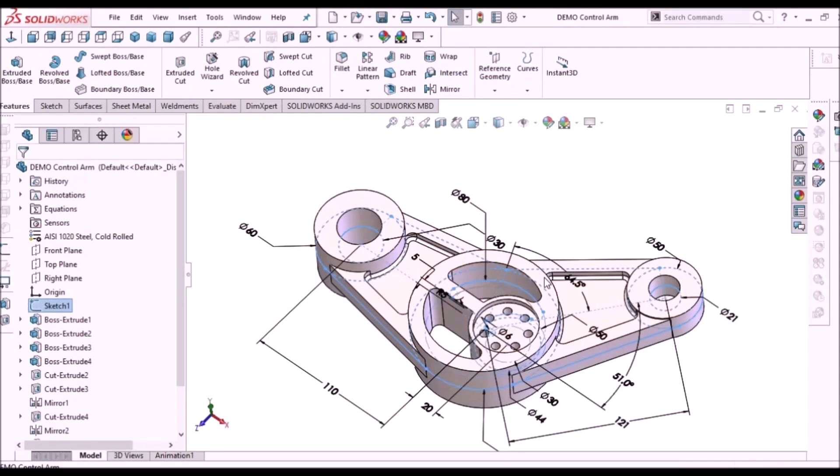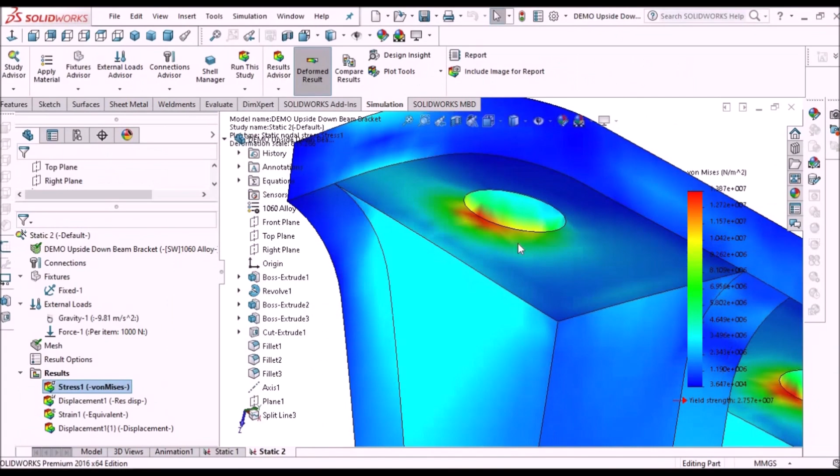I am going to train you in different modules like part modeling, surface modeling, sheet metal enclosure design, plastic components design, product design, reverse engineering, simulation, and many more tips and tricks in SolidWorks.

Hi, today I am going to explain how to create a sheet metal cuff bracelet. I am going to explain this in the sheet metal module. So this is the component.

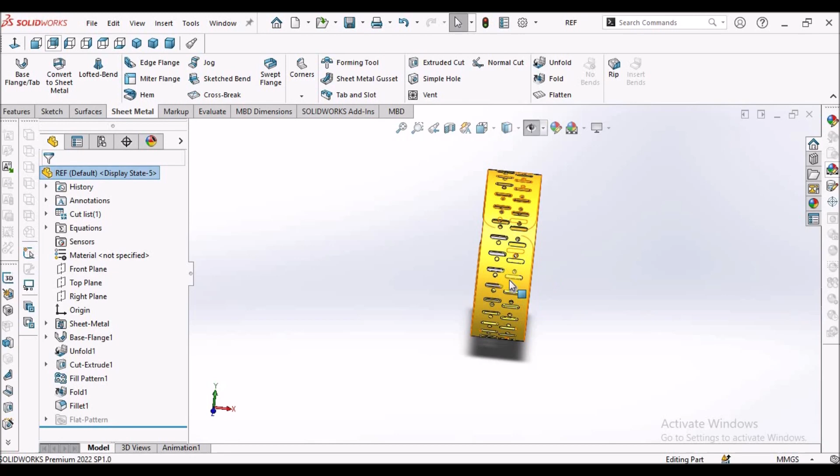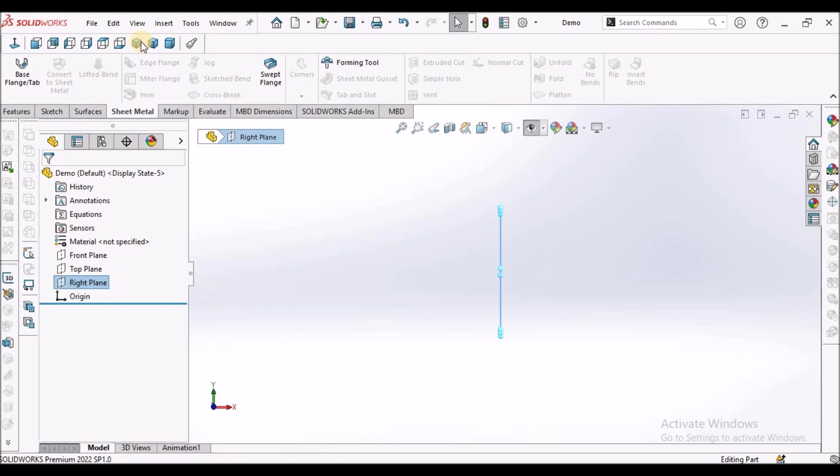So I've taken a new SolidWorks part file. Select the right plane. Go to sketch. Draw a circle. This is 60.

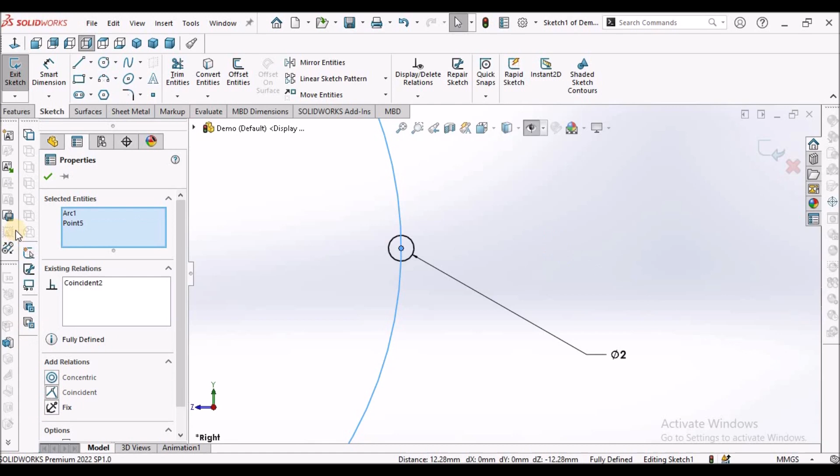Draw one more circle, and I am going to assign 2 mm. Select this center point and origin, make it horizontal, and select this big circle and the center, make it coincide. Now make this circle construction, and go to trim entities and trim this inside.

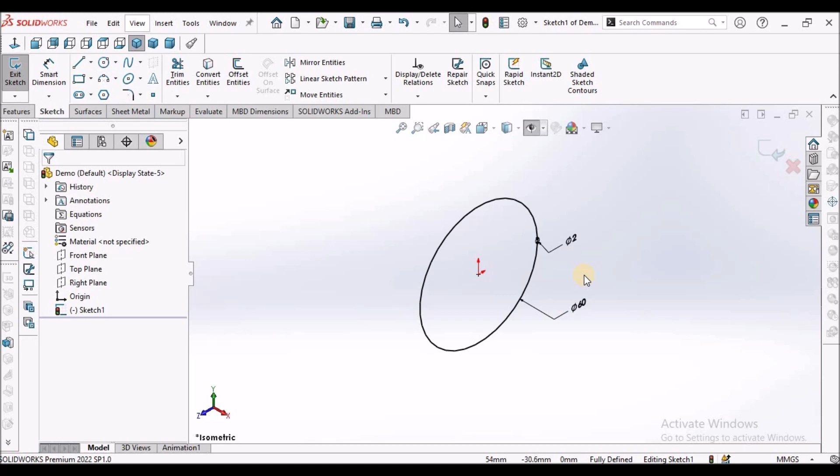So I am going to keep it in isometric view. Now go to sheet metal module, select base flange, and select mid plane. This is 20 mm, and sheet thickness I am going to take 1 mm, radius 1 mm, and K factor 0.45.

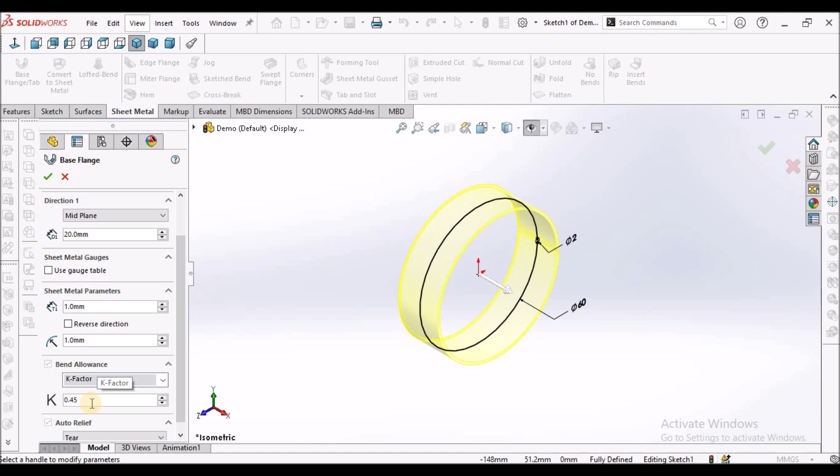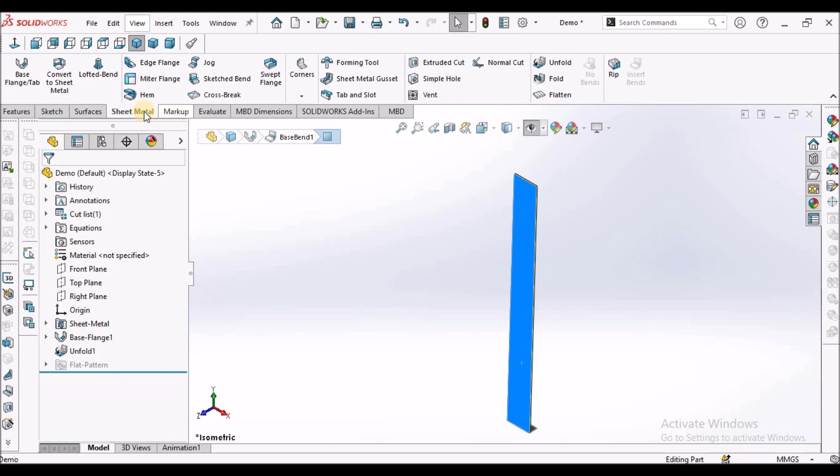Now we have to unfold this. So select this edge, collect all bends, and say OK. See here. Now select this face. Go to sketch.

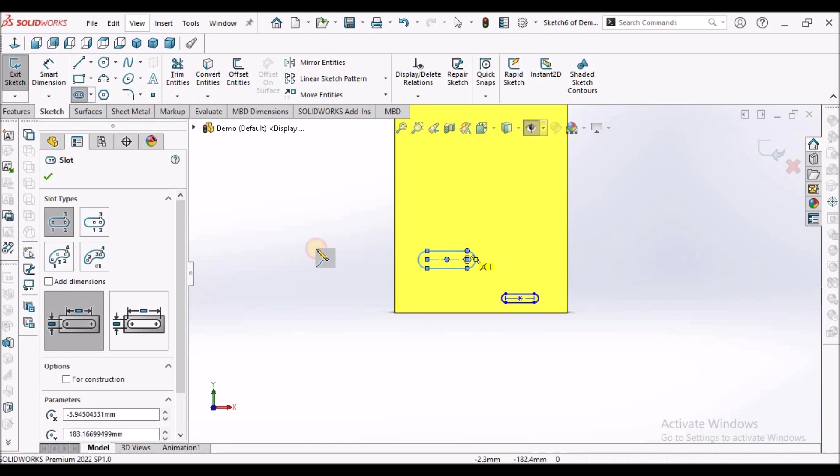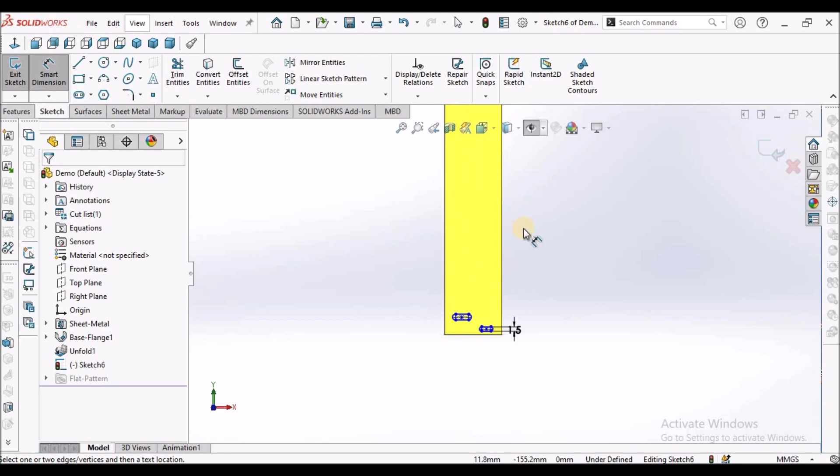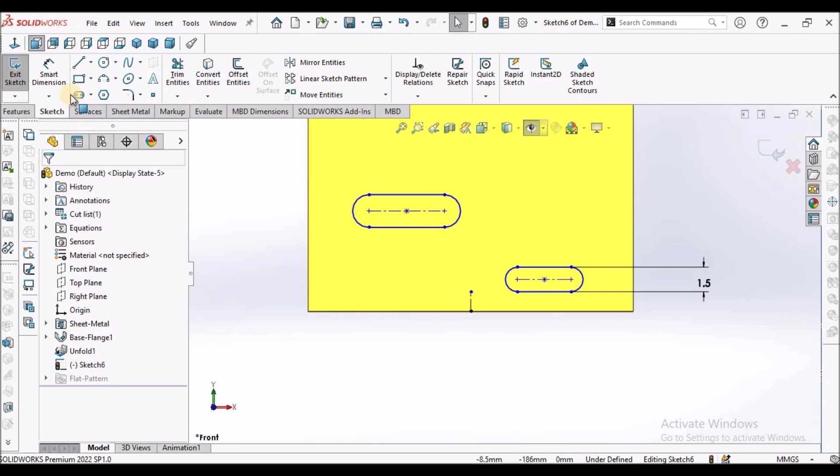Now I am going to create this slot and holes cut out. Draw a straight slot on both the sides. This is 1.5, and this is 3.5. Let me keep it in front of you. Now, for better understanding, I am going to draw one small center line for easy dimensioning. This is 3.5, and this is also 3.5.

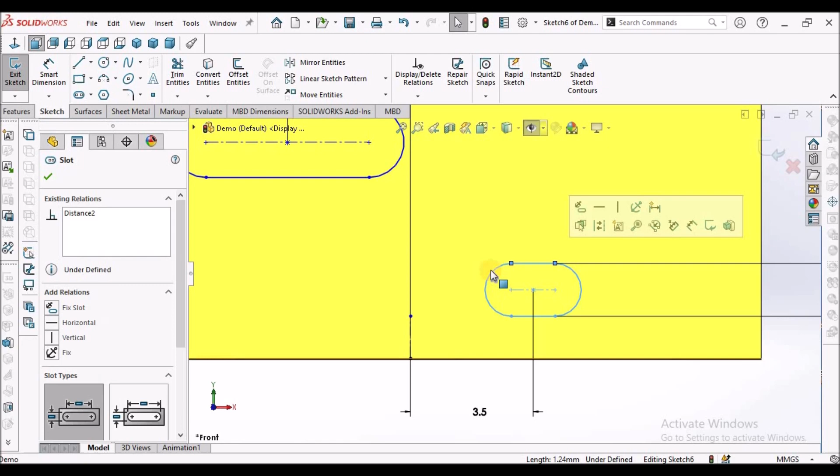We have to select these two lines, this line and this line. So we have an option, equal slots. Select this. Now we can dimension this value. This is 5 mm. See here, this is the 5.

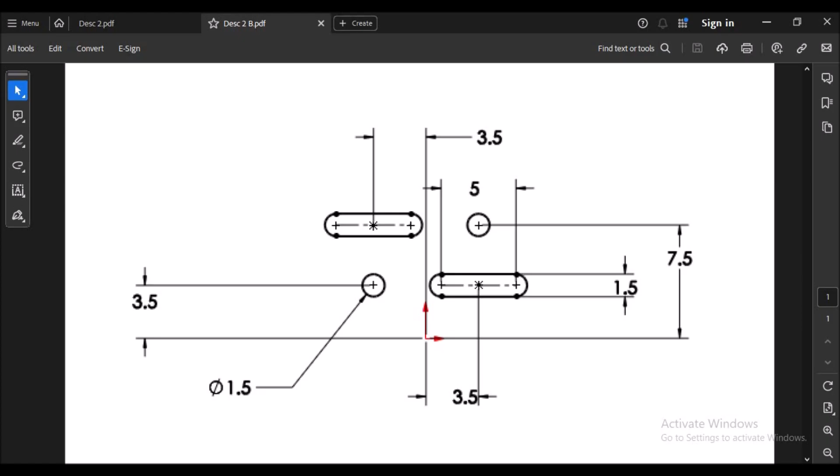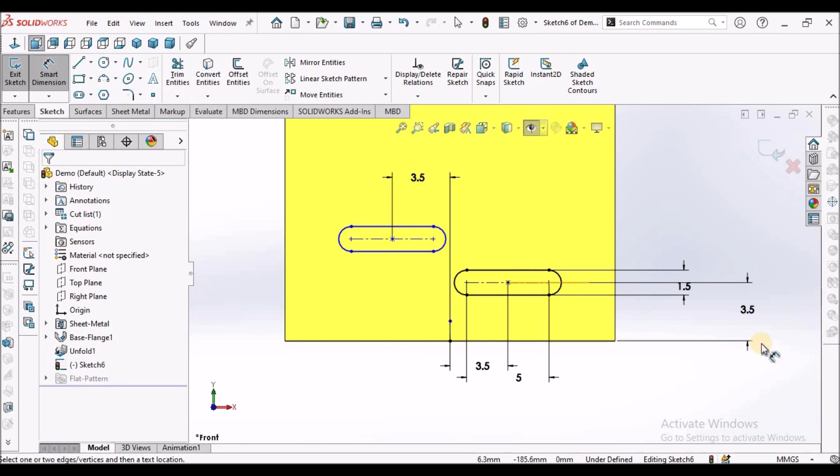And the distance between the center of the slot and this edge is 3.5. Similarly, the other side is 7.5.

Now I am going to draw 2 circles, simply placing them randomly, and I am going to make these 2 circles equal, and this is 1.5. Select the center and this one, make it horizontal, and this center and this center, make it vertical. So it is constrained now. Similarly, select this center and this center, make it vertical, and this one, make it horizontal.

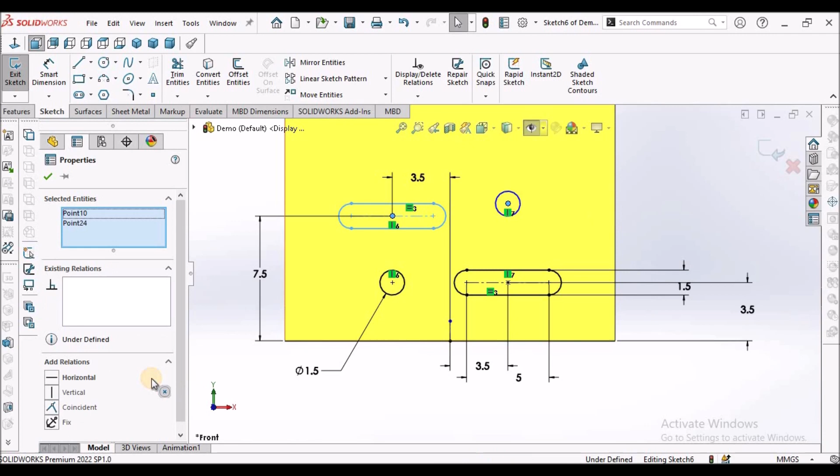Now go to sheet metal module, select link to thickness, and say OK. So this slot has been created now.

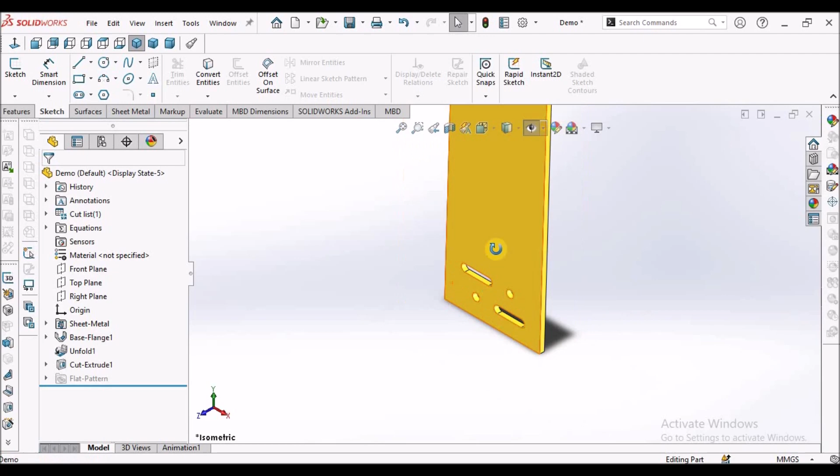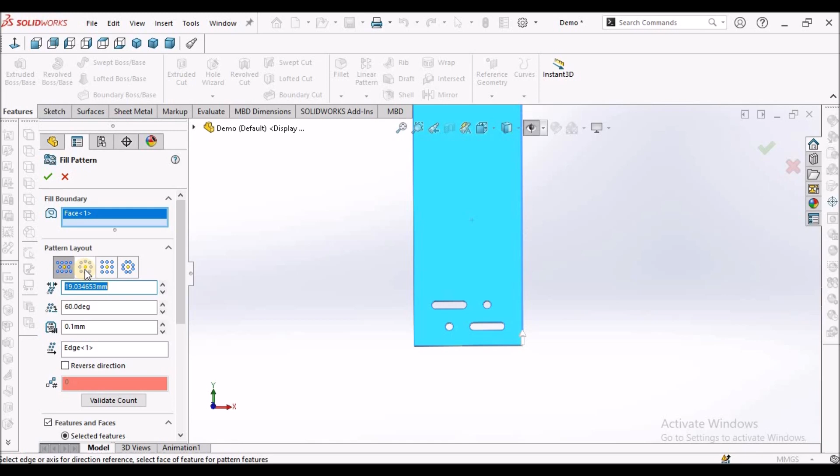Now I am going to create this pattern with the fill pattern command. Go to features and fill pattern. Here, fill boundary, we have to select this face, and it automatically selects all the values like angle 60 degrees, 0.1 gap, and edge direction. Here I am going to take 6 mm.

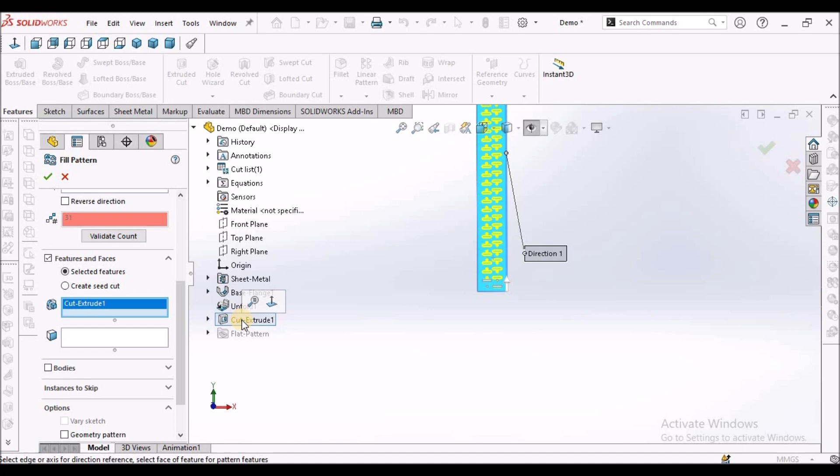And here we have to select the feature. In selected features, we have to choose the feature to be patterned. See here, you can see the pattern, and the propagate visual properties should be highlighted, and say OK.

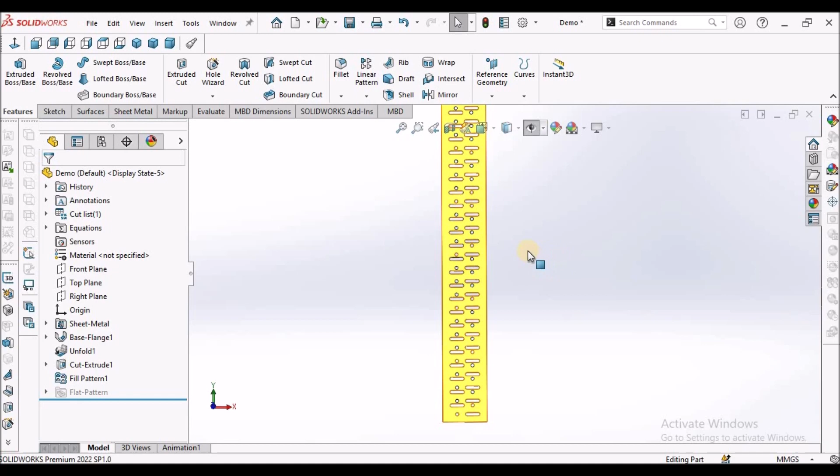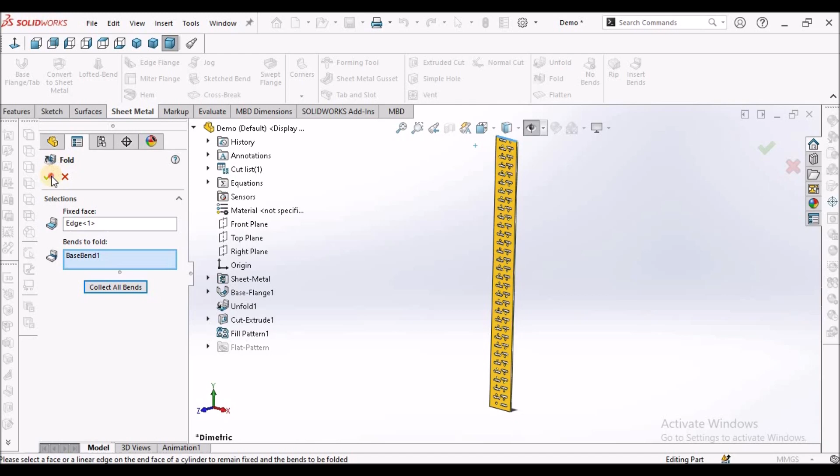So instead of linear pattern, this is the easy method to place the slots. Now we have to unfold it. Go to sheet metal, now we have to fold it. Go to sheet metal and the fold option, select the fold command, select all bends, and say OK. See here, it is created now.

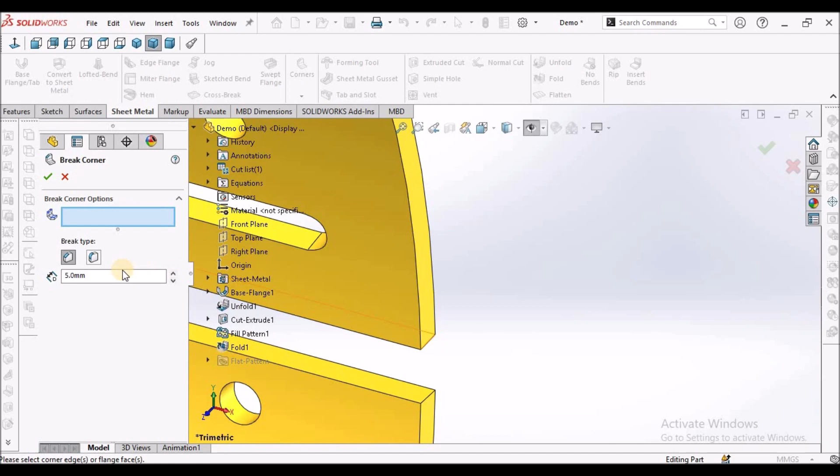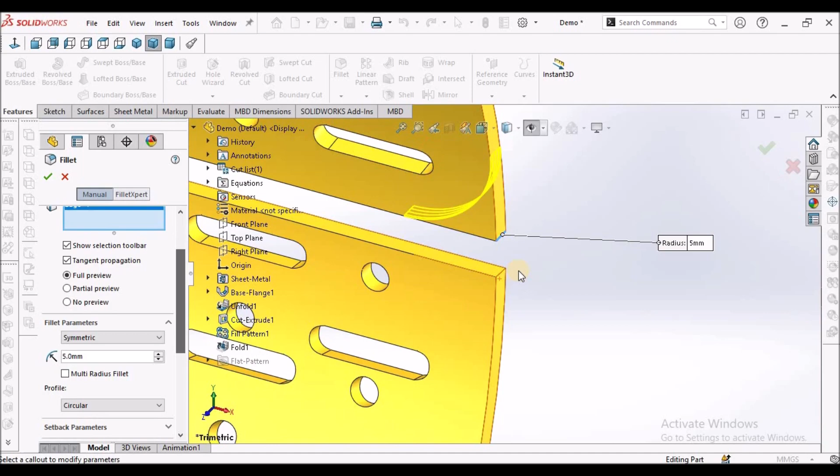For applying fillets at this corner, if I select this break corner option, we cannot apply fillet or chamfer, so it's not possible. In this condition, we have to go to features, fillet. I am going to take a 5 mm radius, select all 4 edges, and say OK.

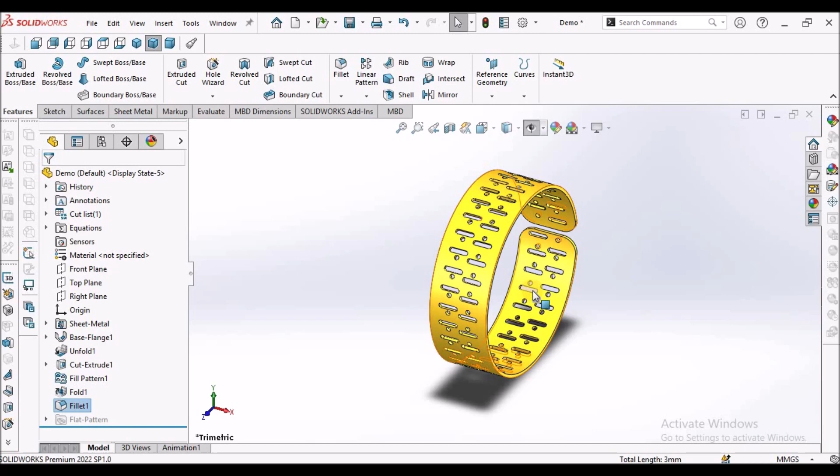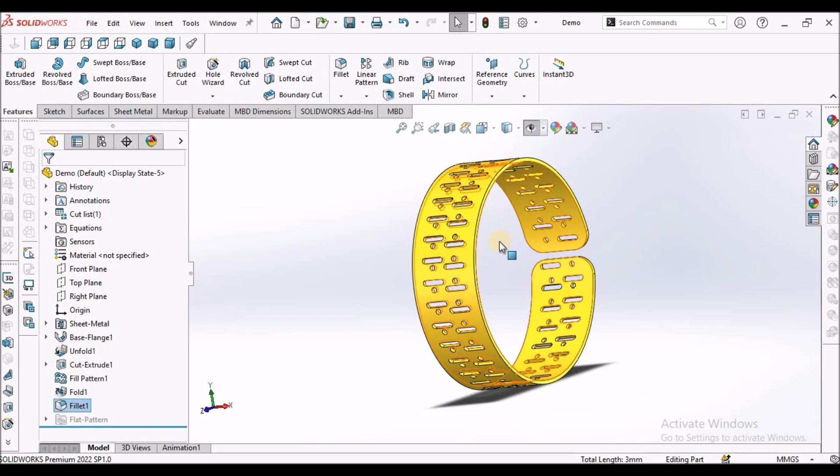See here, so this is the final component. During product design, especially for product styling or aesthetic design, we can implement these kinds of features.

So this is a brief about the sheet metal cuff bracelet. Thanks for watching.